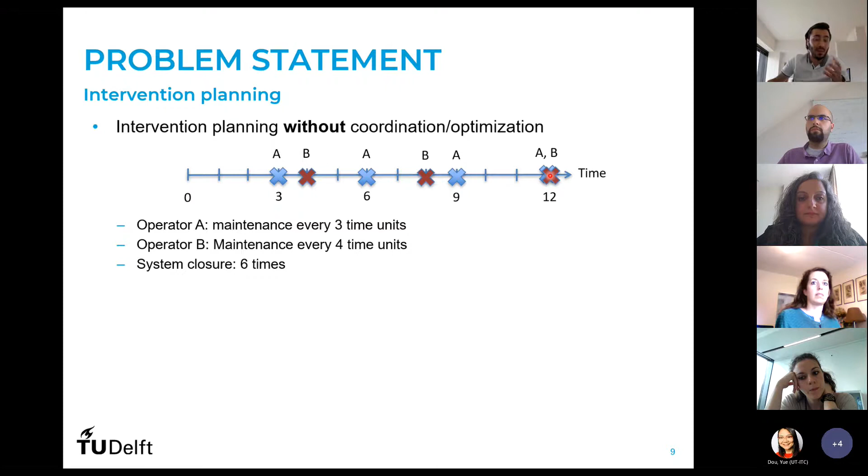Now what happens if we do the coordination - if we manage to group our activities together and implement them in the same time step or time window? For example, we can move B to A, and we can move this B to A here, and A and B are already here together. So instead of having 6 different interruptions of our system, we will only have 4. That's intuitive because the system is very small here, but when it gets complex with several operators and a lot of interdependencies, it's not really easy to do this grouping just like that.

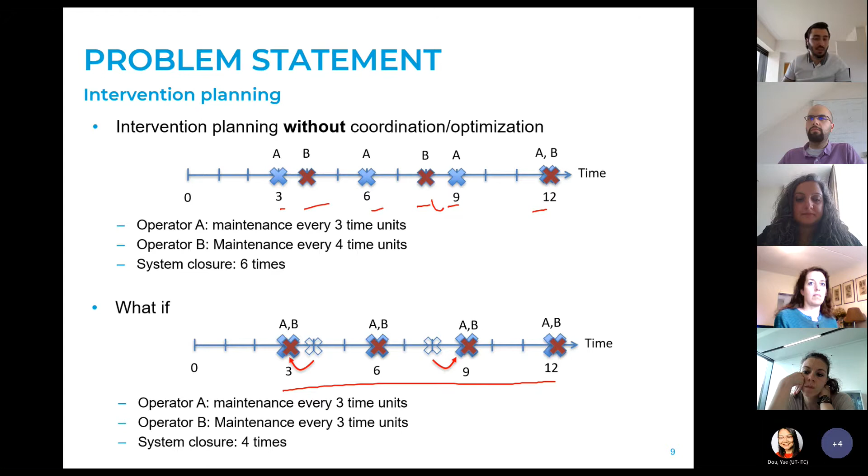We really need a tool for this. Our problem is that we would like to jointly plan intervention activities for multiple operators at the same time. This brings me to the objective.

We are introducing an integrative optimization approach for infrastructure intervention planning in a multi-system and multi-actor setting. Multi-system means multiple networks - water, transportation, and other networks as well. Multi-actor means the multiple operators - different managers and stakeholders who would also like to see how this optimal plan affects every one of our stakeholders.

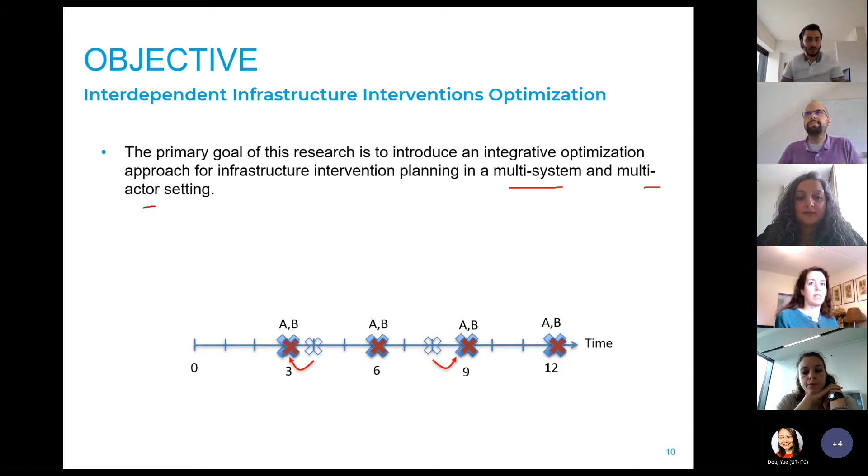Let me now show you how we see our system and how we try to model it. These are the different components of our system. First, we have the operator, the manager of an infrastructure network - an operator can manage one or multiple networks at the same time. A network is an infrastructure network, like a transport highway network or a water network. Every network is composed of different objects, or components - like a highway cross-section for a highway network, or a water pipe for a water network.

These objects from different networks are really interdependent. If one object becomes unavailable due to maintenance - imagine doing maintenance on object 1, so it's unavailable - it might affect another object like object 4, which also becomes unavailable because they are interdependent. Maybe they are in series, so you have to have 1 in order to have 4 as well.

So there is interdependency between them, and we try to capture this using an adjacency matrix - we call it an interaction matrix between objects - in a simple way, because we try to keep things simple and scalable, since infrastructure is a very complex system. If we try to model everything as it is in reality, the method becomes unfeasible to use. So apart from objects, we also have intervention activities.

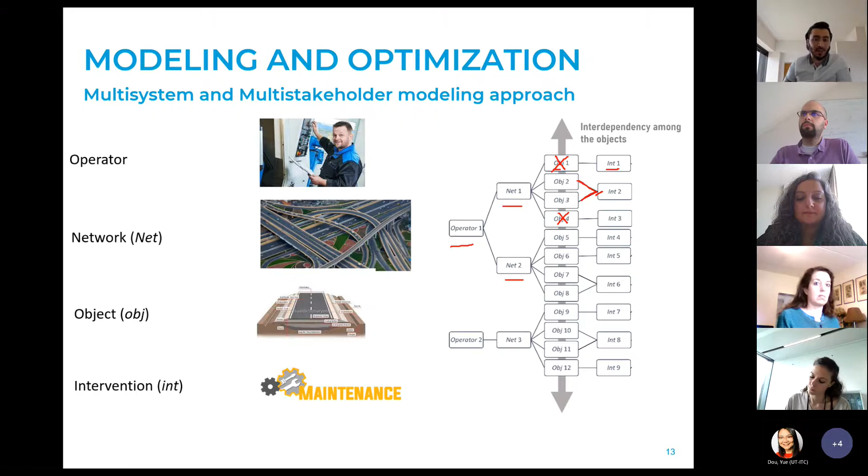Now that I showed you how we model our system and the different elements, I would like to show you a bit more what I mean by interventions and objects using this example, which I'll also be using later on to show you the results.

In this example, we have a small interdependent network composed of 3 infrastructure types. In green, the highway network; in blue, the water network; and in brown here, a small railway section.

As you can see, these objects or components of the different networks intersect at some locations, and these intersections imply that there are interdependencies that we have to really accommodate.

Just to give an example, as you can see here, we have a water pipe that's buried under and crosses below one of the highways. So if you want to do maintenance for water pipe 1, you probably need to excavate this highway, so some kind of excavation here in order to reach W1.

So it means that if W1 is unavailable due to maintenance, also H1, which is not under maintenance, will be unavailable. Now it's really smart if we could plan activities together, also planning H1 to be maintained at the same time, because in any case we are going to excavate it.

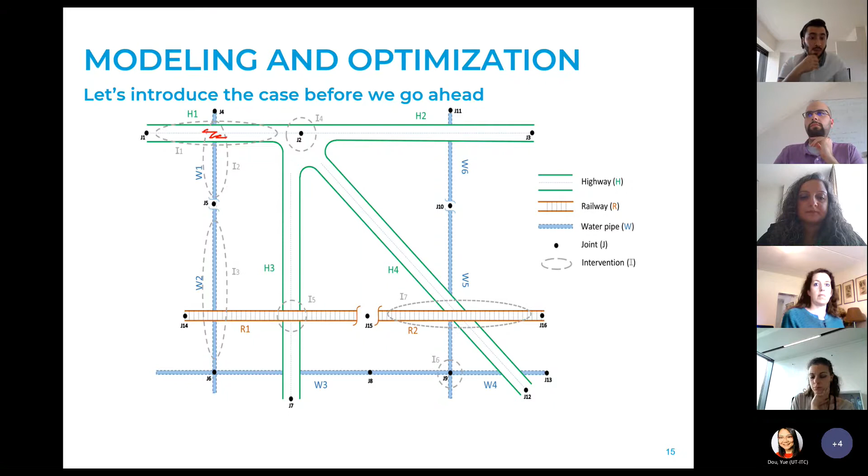So I showed you how we model things, but now I would like to show you how we do, in simple terms, the optimization.

Our optimization problem here is divided into 2 stages. First, we have stage 1, which is optimization, or tentative intervention scheduling, for individual objects. So we focus on individual objects, not the whole system.

Imagine we have 3 different objects, only 3. We just focus on each one, and we try to find the best plan for that object using a degradation model. Then we focus on another object, find its plan, and then another object and find its plan. So we don't really do the system view that I introduced before, but we just look at every component apart.

Why do that? Because this is the first step for the global optimization. We need to do that in order to know where we start from. For example, now we can start from this preliminary plan in order to do the global optimization for the whole system together, for all objects together.

Now, just a little exercise. If I tell you to do the global optimization for this preliminary plan, what are you going to do? How do you group these activities together?

Maybe someone will say we can move B4 to here, plan it with A3, and move C2 to here, also plan it with A3 and B4, so we have them all together. B3, we can move it to here with A2, and B2 we move it back a bit because it's now too close to B3. Maybe we can add another B here because the distance between B3 and B4 now is great. So from this, we get another plan like that.

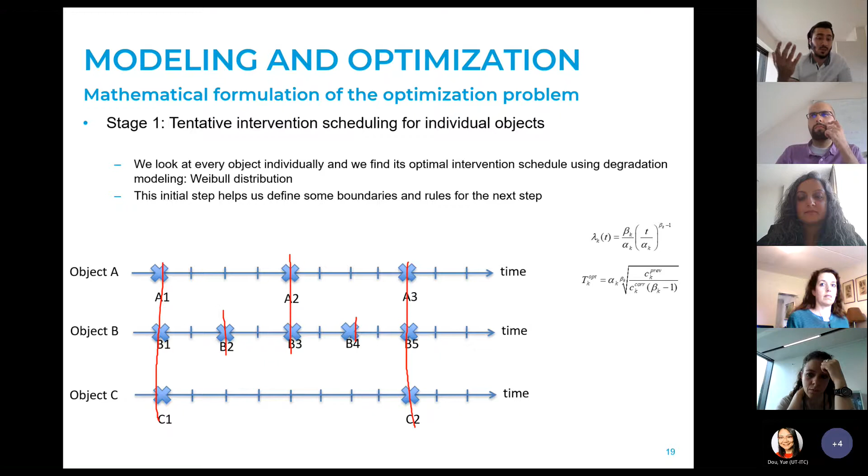And this is stage 2, which is going to do just this for us. So I just want you to focus on this — this is the objective function of our optimization.

So what we are trying to do is reduce our net cost. We try to keep cost minimum, and then we can get the corresponding plan. So we minimize the net cost, which is divided into a few terms: the cost of intervention activities, the cost of service interruption, and the setup cost. All of these sum up to what we call the total cost, or net cost, which we'd like to keep minimum.

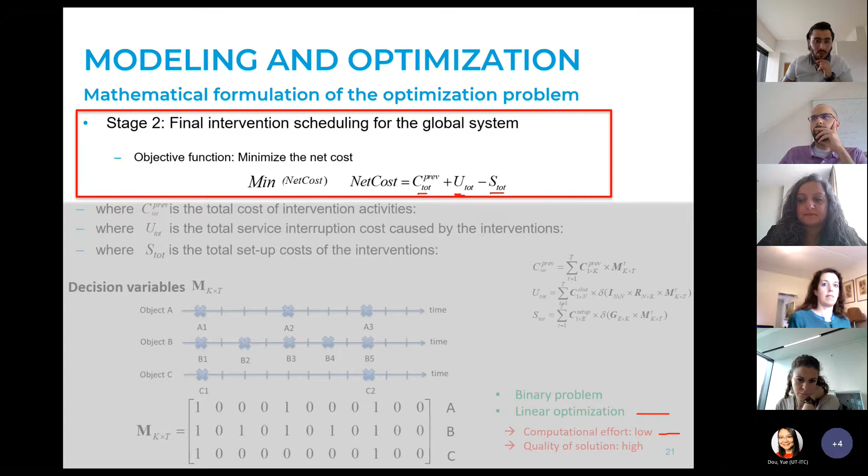We would like to minimize it in order to be paying less. Our problem is a linear problem, which is great because it yields the best solution and the computation effort is low. That's good to know since it's a complex system, so we have to keep things linear.

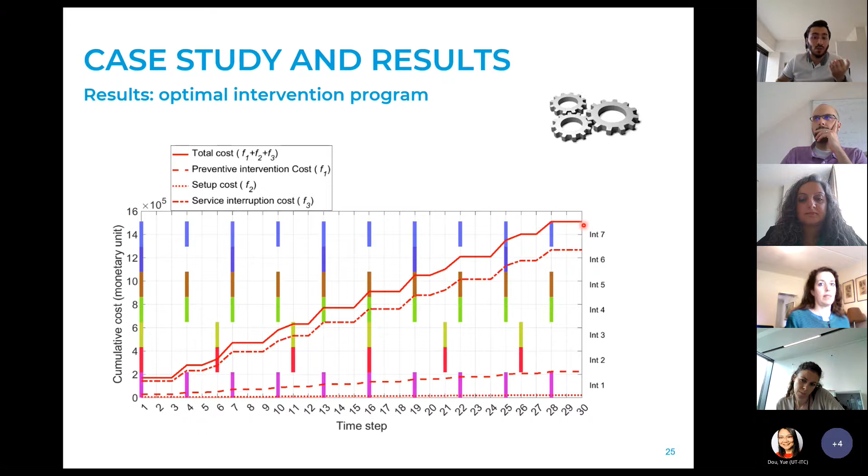...better is this compared to other conventional planning? We compared it to the normal approach that infrastructure operators use, called the individual approach—everybody plans their own interventions, and then we sum up all the costs to get the total. And this is what we got: with the optimal program from this tool, we got this amount, a 17% cost reduction. So we could get savings just by better rearranging activities and grouping them.

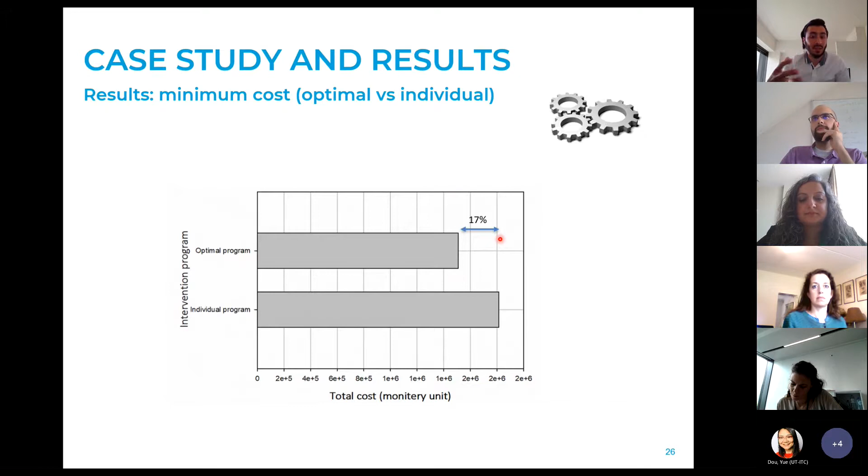This is just to show the performance of our algorithm. We show the computational time as the number of variables increases. Let me go back a bit. Here we consider 30 time steps, which took just 1 second. But if we increase 30 time steps to 3,000, we finish in 80 seconds, which is still great because 3,000 is a very large number. The relationship is kind of linear, which is great for such a complex system because it means our approach is scalable.

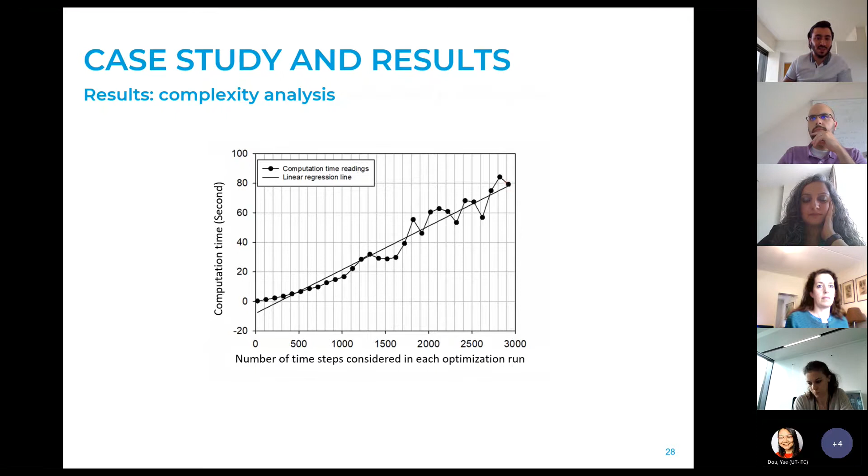So what's special about this method? What's special about this intervention method is that it's multi-system modeling. It captures interdependencies between interventions of multiple operators at the same time. So it's not just oriented to one network or one system, but to all systems together. And it needs coordination to be able to apply it. And it's easily scalable.